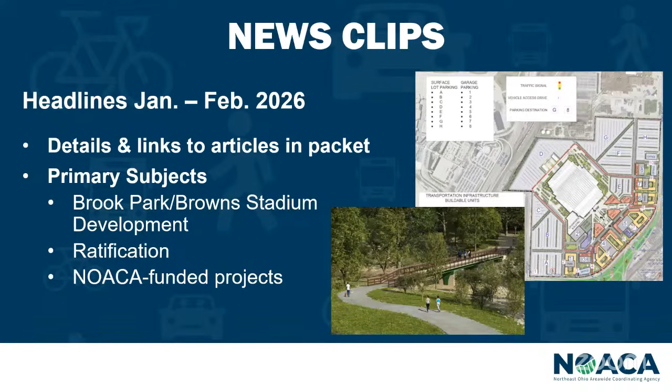Back to the reason we're here: we are here to plan for regional projects and then support them in getting done by helping to fund them. We had a successful GoHio commute campaign, being able to offset carbon, which is important in our air quality work.

External engagement, some of the things that I've been up to over the last 2 months. I went to NARC, the National Association of Regional Councils, their National Conference of Regions, which was in Washington. We spent a lot of time on the BASICS Act, which is a proposal to Congress of legislation relevant to local governments. It is part of a consortium of organizations that worked to develop this proposal, and we will be discussing it in great detail on our Transportation Day on April 1st.

So keep that on your calendar, and I know there's a slide here later that will remind you of that. I participated in a panel with ODOT and the Turnpike Commission about funding and budget forecasting for transportation. That was for WTS, Women in Transportation. I participated in the 2026 Safe Road Summit.

We were asked and able to participate in a session that focused on a national perspective in safety and highlighted the work that we are doing here in Northeast Ohio as exemplary. We also were able to participate in a session that we submitted an abstract for, and that's Vision Zero. And then we were able to meet yesterday with all of the participants in the CMAQ round and get the project sponsors moving earlier to begin their project work that has to move through ODOT and some other process points. Just wanting to make sure that we're moving the projects across the finish line.

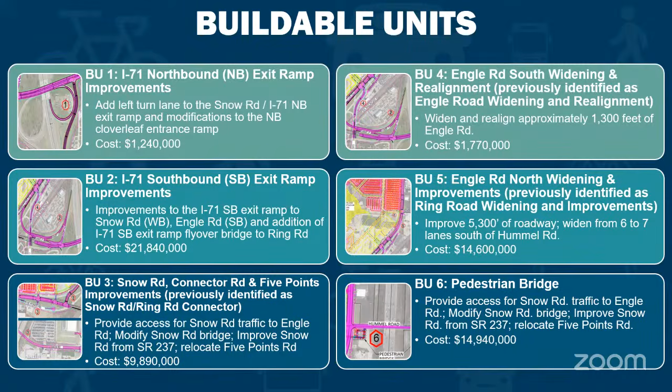The committee recommended there that the project be recommitted to the Transportation Subcommittee, subject to review of the severity of congestion during major events and possible resolutions, including impact to surrounding communities, access to Hopkins Airport and Southwest General Hospital during events, and then looking at regional impact and collaboration.

Then on December 5th, we presented it again to the Business, Community, and Rural Advisory Councils, followed by the Transportation Subcommittee. On December 19th, they recommended it to the Planning and Programming Committee. Then finally, on January 30th, it was presented for action to the Planning and Programming Committee and recommended for approval. We also, as we always do, presented it to the Executive Committee on February 13th for their recommendation as well to the board, which brings us to today.

Now I will turn this presentation over to Dr. Makarachi to share with you the NOACA analysis.

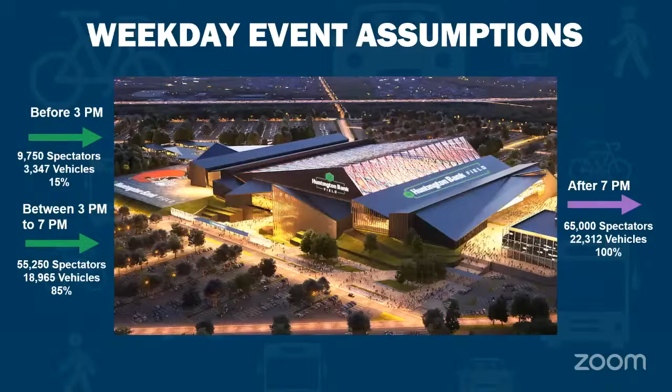So let me mention this first assumption. Again, this information is from the sponsor, and that's the stadium will have 65,000 capacity, and we assume that weekday event happens, not weekend. Weekend has got low traffic, so we assume the weekday event, and that's 65,000.

Then usually people travel to the game not alone. Usually most people travel with family or friends. So we use 2.91 as each car, divided by that for each car.

Then we have people coming from 3 to 7 to the game, and after 7 they leave the game. Why are we choosing these periods? Because our travel demand model has 5 periods, splitting the 24 hours into 5 periods. One of the periods, PM peak period, is from 3 to 7, and the nighttime is from 7 to 3 in the morning, and comes back 3 to 6, 6 to 9, and so on. So that's what you see in the numbers here.

The assumption is 15% come before 3 p.m. for a game and 85% come during the PM peak. Why is that important? Because the PM peak period is when people actually leave work and go home, and that's the most congested period of time in our region. Obviously after 7, when they leave, there's not much activity, it's mainly the trips from stadium back to home.

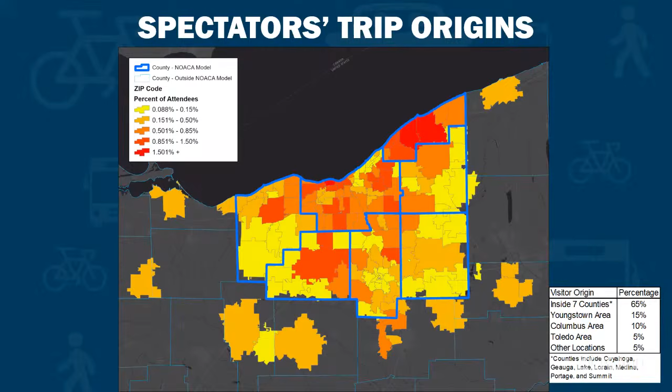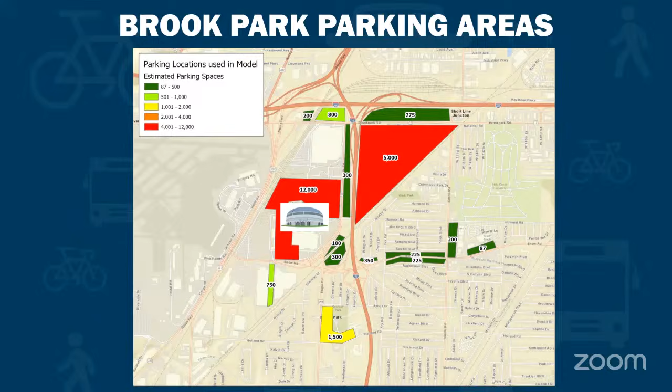Last week we had a workshop about this, and some people came, and the feedback we got was that some cities were concerned about the impact of this in their city, apart from the city of Brook Park. So we went and looked at this influence area, and we have this for each city on this map. We provide the impacts, and I have to say, one of my colleagues, Derek Taylor—I have to appreciate him—made the maps for this, and we had a very short period of time, from Tuesday afternoon to this morning.

These following maps were made by his team. Since I was working on something else, within a couple of days they provided this information.

What we are looking at in terms of the comparison is the auto and truck delay, and then volume capacity ratios. I have to emphasize the capacity I mean is not a storage capacity, but a road capacity, which means how much they can process cars within a period of time, an hour, three hours, whatever.

There were two locations they were concerned about: one was the airport, and one was the Southwest General. We looked at those using our travel forecasting model, and at the macro level, I'll show you. We use the micro level as well.

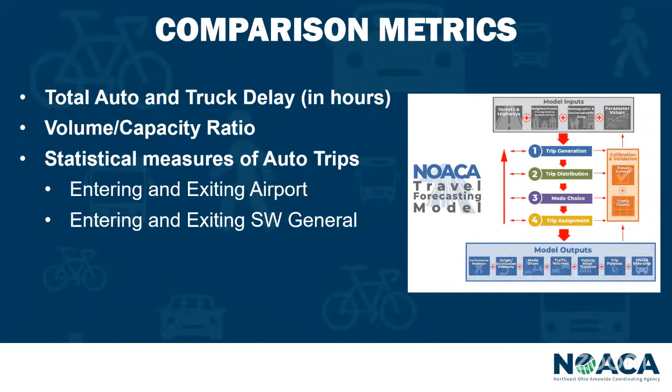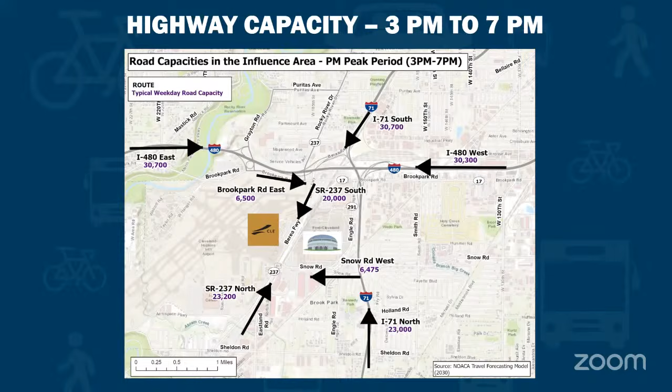About 30,000 on the highways, because it's mostly 4 lanes over 4 hours. This map shows - I think I missed something, no, that's correct.

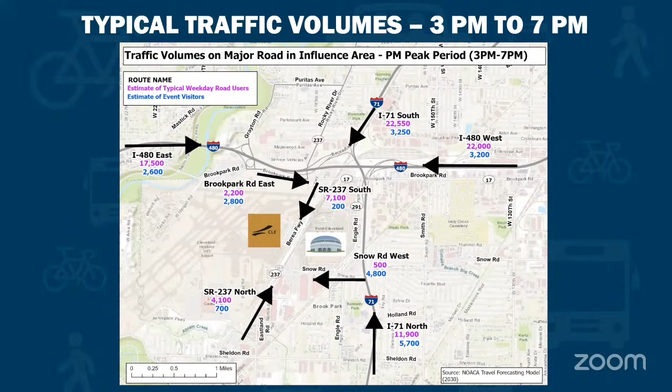So Ali, can I interrupt for a minute? Just to be clear, what this is demonstrating is that based on our independent modeling, the highway network has sufficient capacity to deal with the incremental traffic from the new development.

That's correct. The additional traffic we have is shown in blue, with the numbers and percentages I'm showing. Let me just review that quickly - the highway system around the stadium and in our region can handle that.

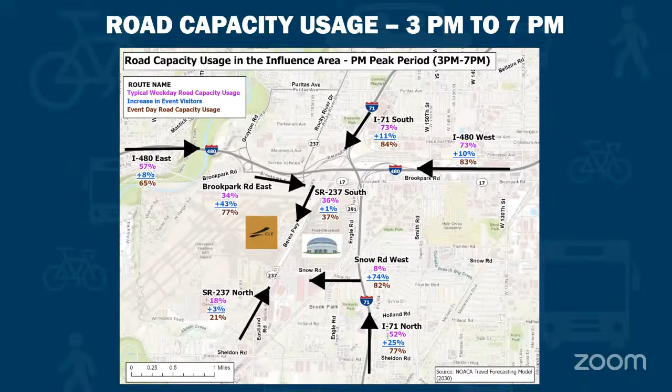Then we look at this area, and what you see circled is an interchange and intersection that is a concern area after people coming to the game. Obviously, when they get closer to the game there are more cars, so you can see.

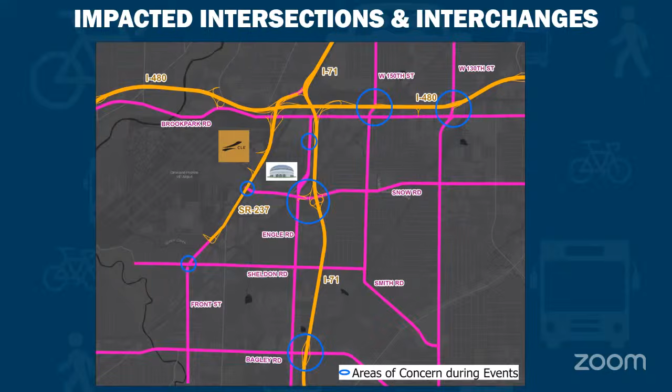We are looking at each community, as I mentioned, on the maps. Starting with Berea - what we have is yellow, which is very low, less than 10% in terms of capacity impacts on this area. The only concern is a little bit moderate, about less than 50% increase, shown in blue. There's only one location like that in Berea.

By the way, if any of the mayors, communities, or cities want this, we can send them the base, event, and difference maps. All this is done - as I said, Eric has made all these maps, and he can forward and send it to everybody on any committee that's interested.

This is Brooklyn, and there's only one location with a yellow impact, a minor impact there.

The city of Cleveland has got some borderline areas with Brook Park, and a couple, as you see on the map in yellow, which is about adding 10% to the capacity, to the volume for the capacity.

Next is the city of Fairview Park. Again, you can see on this map I showed earlier the influence area, and these are the cities around Brook Park. For Middleburg Heights, there's only one important interchange there, the Bagley Road interchange with I-71.

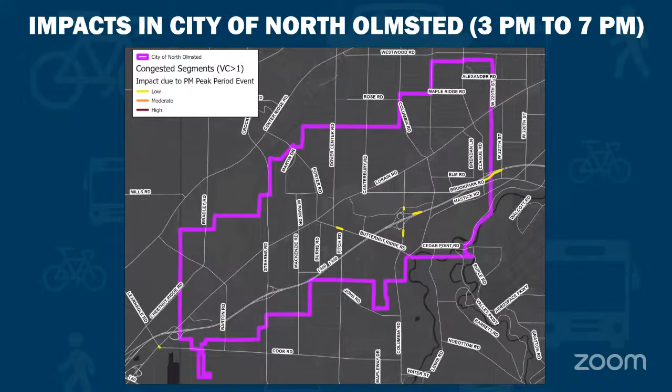Parma and Parma Heights - the only one place is a concern. The rest is yellow, or there's nothing, no changes on Parma and Parma Heights.

But the main issue is the city of Brook Park itself, and we'll come back to this and show the simulation for this area. There are several places either bordering other cities or inside the city of Brook Park. Those are the buildable units Ed mentioned, close to the stadium and development, to reduce the congestion impact of this.

As I mentioned, the other route to the airport was a concern. So what you see on this map, the black line shows the route to the airport. The majority of over 750 vehicles obviously come from neighborhoods, but that tiny addition is not significant. The green one is the one coming to the stadium.

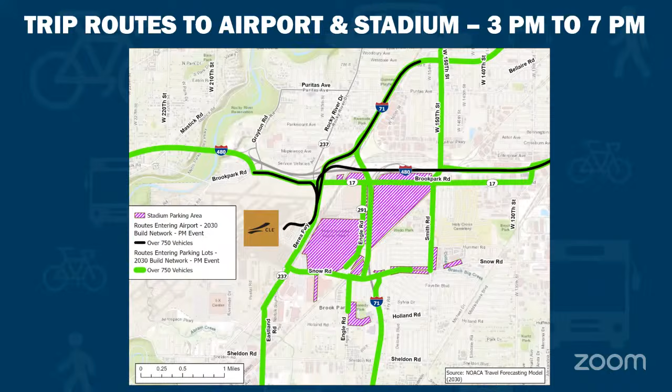Based on that, we took some statistical measures to see how much impact this has on trips to the airport. You can see on this weighted average for a base - when I say weighted average, we took the average of the travel time and added to it the number of trips coming from each neighborhood. The maximum delay goes up to about 3 minutes for some neighborhoods, and total delay for the whole region is 96 hours.

After 7, obviously not much traffic is going on, and it's 2.3 hours. So basically it's the same thing, you can see it's very close. We concluded that there is a marginal impact on travel to the airport.

Southwest General, that's the hospital south of Middleburg. Again, the black line shows the trips going there. This is a technique we use in our model - identify the cars by their destinations, tag them, and show them. The black line shows some of them going to Southwest General Hospital, in the opposite direction of people coming to the stadium.

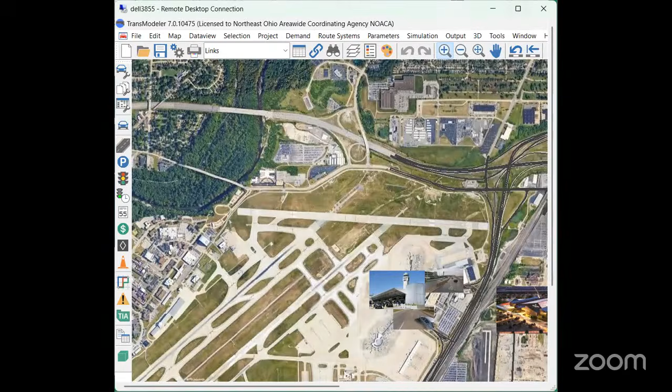However, we have identified, as you just saw, many other pinch points and potential areas of congestion that will require some mitigation. Those have not yet been studied enough, or there have not been recommendations on infrastructure solutions.

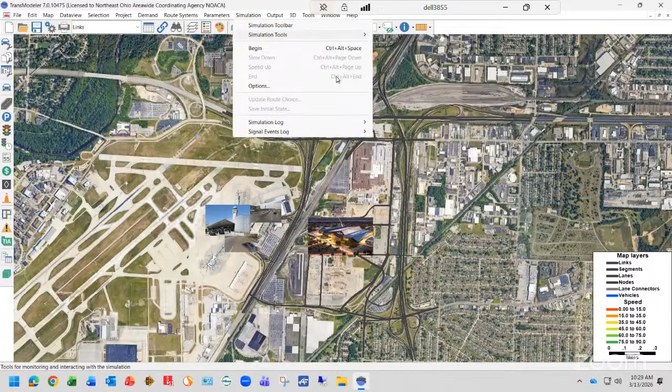So what staff is proposing is that we concur that the 6 buildable units being requested by Brook Park for this project will in fact help alleviate the congestion for the city of Brook Park around the stadium. For the other communities, we are saying that this action is contingent upon further review of those other communities, development of solutions for their transportation infrastructure.

That would be a phase 2. So this will be phase 1, only the city of Brook Park, but we are concerned about those outlying communities, and that will be phase 2 that would come back to the board.

Is there any questions for the speaker? So I think Ali's going to show a simulation. He's pretending that it's a day in 2030 after the stadium has been built, and there's an event on a Wednesday afternoon. This is intended to be a worst case scenario. So go ahead, take us through the simulation.

There's a question. Executive Director Gallucci, if I could just ask a couple questions related to what you just mentioned, and we appreciate the suburbs around this development being included in some of the analysis. One is what consideration has been given for the future of the IX Center. I think that's important, and I'm not sure with the changes there recently how that can be considered. Also, I would include the Metro Parks.

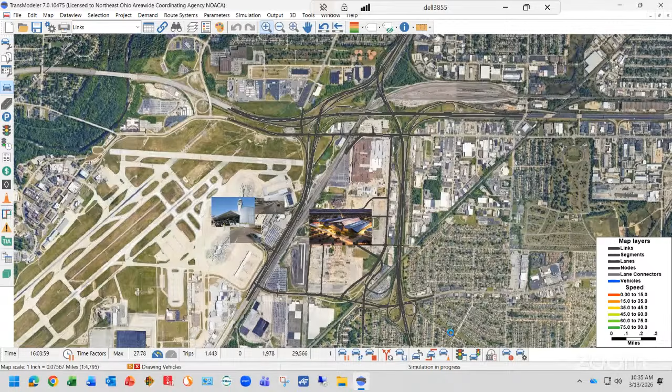That's the Snow Road interchange, and importantly, if you look at the right-hand side legend, cars are colored based on their speed. Let me zoom in more so I can explain.

The yellow goes down, and when it's red, you see here, for example, they stop by the traffic lights, and the vehicle's color changes to red and orange and stops because the speed comes down to less than 15.

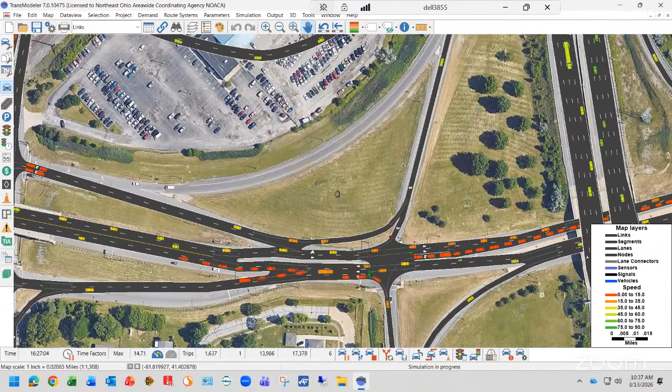When I zoom out, you see more, and these show groups of vehicles, each circle representing a group. You can see again based on the color of this, and one concern and question was about 237.

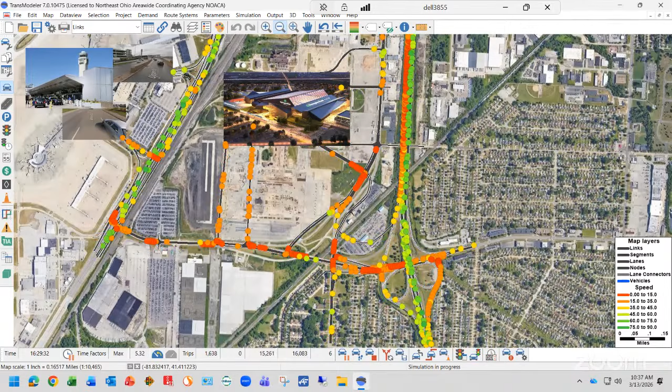I will go near the airport. These are the entrance and exit from the airport. As you see, 237 is mainly light green, or when they slow down here wanting to go inside the parking lot, they become yellow and reduce speed.

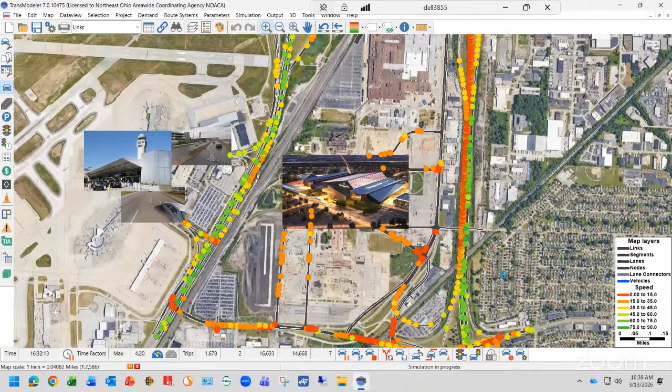The interesting point is on this side, I-71 - that was one of the workshop questions. We were asked to look at the highways. As it goes south, people go to the parking lot and the traffic comes back.

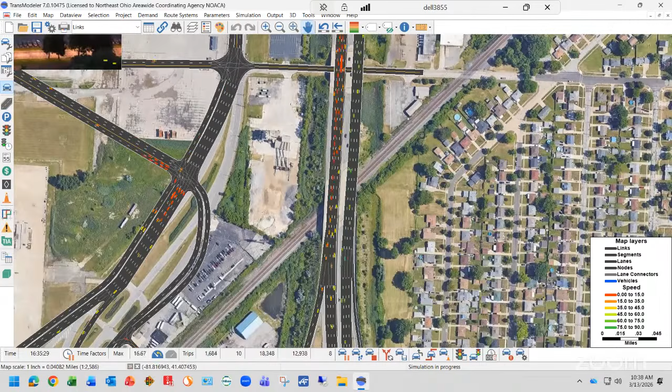This is one of my routes home on I-71, and I can tell you this happens mostly in the afternoon. I want to draw your attention to the color of the cars before they exit to the stadium.

And after the exit, you can see there's a little bit of delay there, orange and red, then it goes down, becomes green, comes back the same, and the other side, same thing.

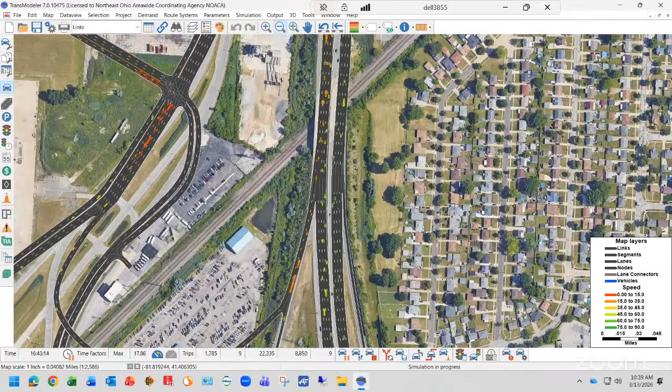Let's look a little bit north, and I want to pay attention to 16:42, 43. If we go north, because people are now close to the event, there are more cars on I-71.

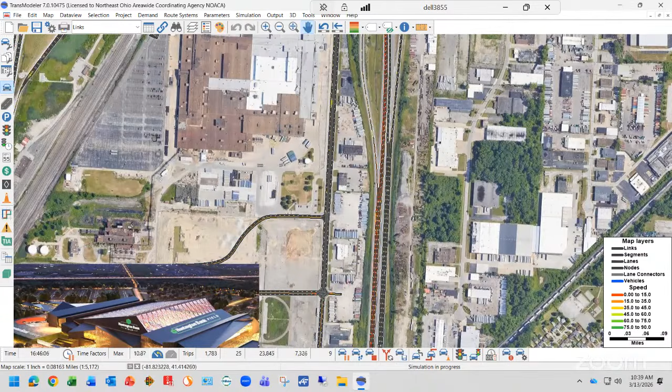But if I go to this side of the airport, still most cars have their own intended speed - 60, 45, 55.

As you see, the traffic is fairly fine on Brook Park, and let's go more north to 480 and all this Spaghetti Junction here - all these are moving apart from I-71, which is going to the stadium. The rest don't have much traffic. Now look at the time in the left corner, 16:49.

I can zoom into one area here for the intersection of Brook Park, and you can see people.

I could show this in 3D, but I'm afraid it might cause memory issues and crashes, so that's why we're staying in 2D, but I can make a video for the 3D version.

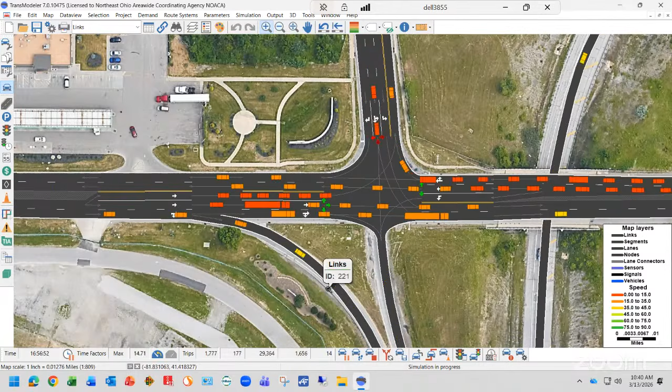That's 16:57. We are getting closer to the end of the simulation time.

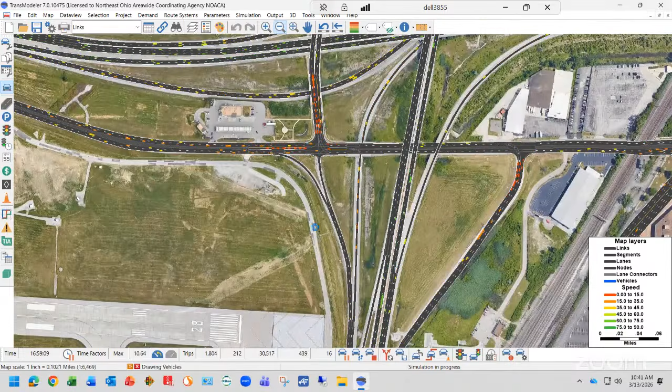Traffic is impacted, but we expect that when you have 65,000 people come to the game. So this is the end of the 5 o'clock, and the results are now in the files, showing the delay and average speed for each of the road segments.

Now, the next one I want to show you is the evening when people leave. Still, we are okay with that.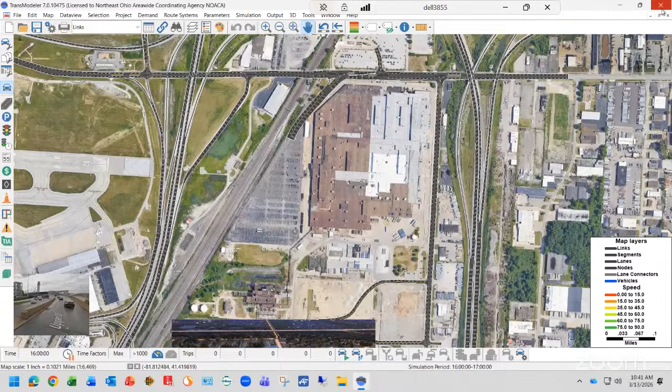Can I close it? Close and open up? Okay, I was told not to click so many times. You have seen this.

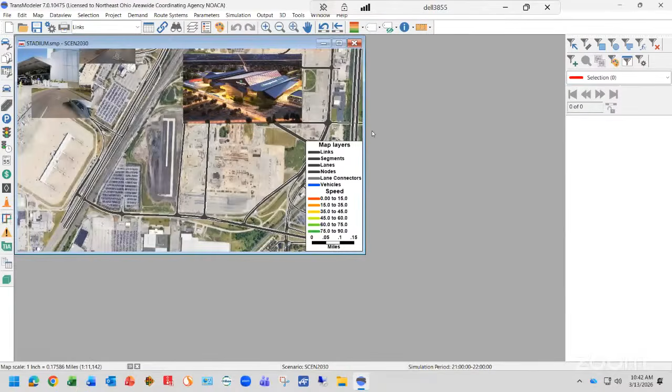What I'm going to show you, sorry for the delay, is after the game, when the game finished and people are leaving the area.

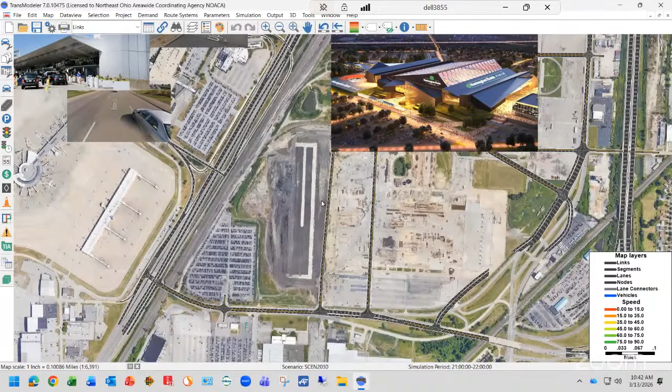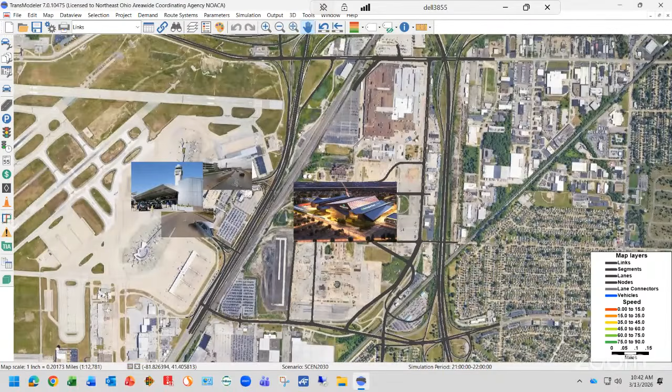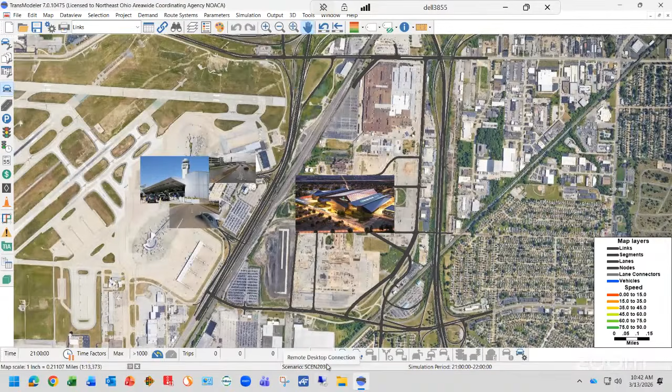Obviously this is not much of a concern because the daily traffic is much lower. This is starting from 9 o'clock, 21, on the left corner, and for an hour I will show you.

As you see, I draw your attention to when it comes - fewer flights after 9, so the number of cars coming to the airport is less, but the number of cars leaving the airport is much higher than the number coming in. This is because at 9 o'clock, not much - all the flights are in the afternoon from 3 to 5, according to the data we got from the airport.

On I-71 at this time, there's no red, everybody is moving. The only thing is everybody leaves the stadium through different gates, and this is very normal because we are assuming 12,000 cars suddenly use a 2-lane or even 1-lane exit.

That's going to be managed by the city of Brook Park. There will be a camera and they will be managed by police to make sure everybody - but as you see from this picture and simulation, most people try to reach I-71 south and north and leave the area, because I-71 has enough capacity and there's no daily traffic at 9 o'clock - no work trips, nothing. So many lanes are vacant and they can use them.

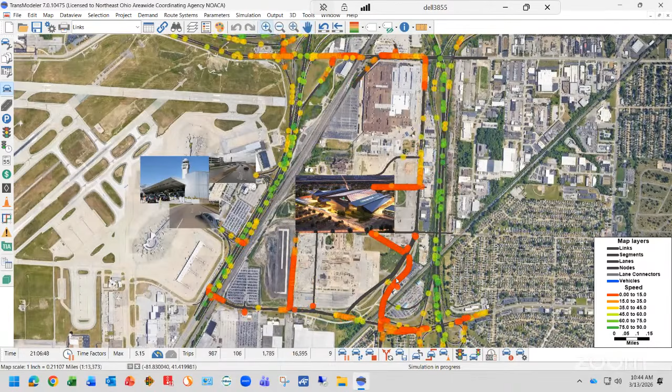But the problem is getting access to the freeway. As if I go north now - I have to zoom in and speed up a bit - the main issue, as you see, is the red: people coming out of the stadium want to go.

to Snow Road and come to the two ramps of I-71 to go north and south. There's no issue on these ramps. The main one, as you see, for example, is the one we had on the approach to the stadium, the one I am talking about.

This is the wrong time - so the one I'm talking about is the exit ramp. There's not much there because people are leaving, not coming; in the PM, it was coming, now there's nothing there and not many cars here and there - but the rest you can see, all this. But let's look at the north side of it.

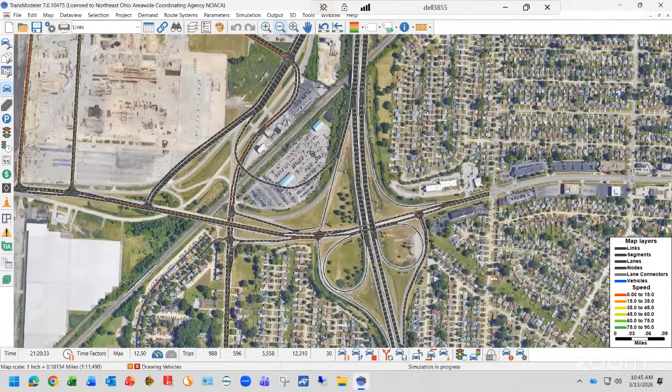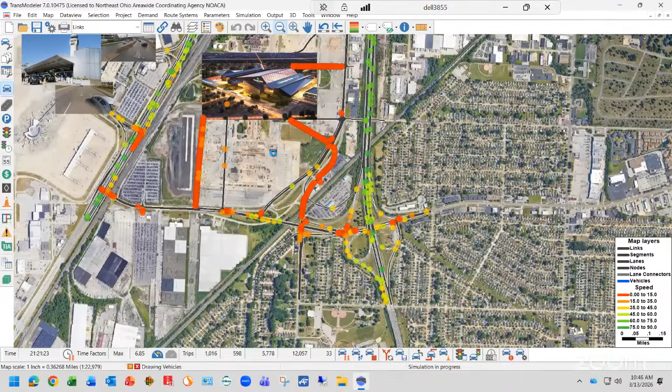And now is it 9:20? Still the exiting gates are congested. Maybe people should take some drink before they leave home - they can do something there before. Hopefully they have won the game on that day.

So now it's 480 here, east-west. Again, not much - there's no daily traffic, so even Brook Park is much quieter. The only people are those who want to go from Brook Park and Engle Road north. One of the buildable units was to widen Engle Road, which helps people go to Brook Park and out of the area.

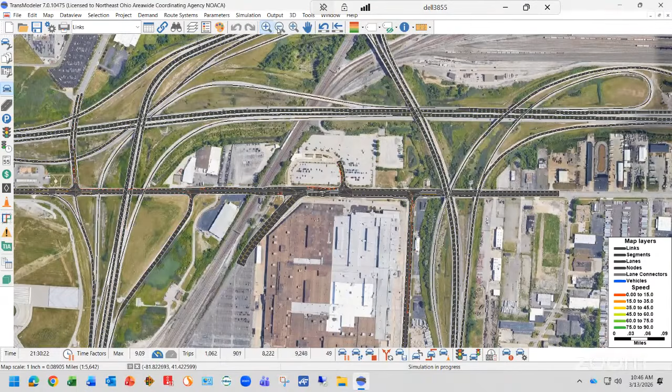Now it's 9:30 in this simulation, and you see on 480, as I mentioned, the Spaghetti Junction is pretty quiet, and the traffic is green - most going 60-70, with some yellows because they're coming to a ramp where the speed limit is about 35, so they slow down. The simulation perfectly shows the color of the cars as they slow down. As you can see, Brook Park is red because there's a traffic light and they stop there.

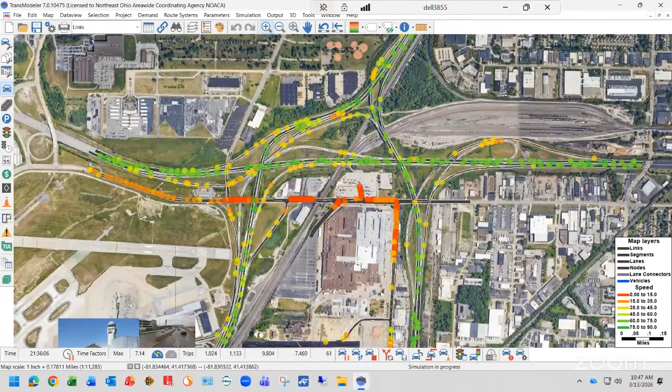So then another visit is at 2135, another visit to see what happens to the airport.

As you see, as I mentioned, not many traffic is coming to airport because it's now 9:30, not much flights. But leaving is, there is more traffic going, and you can see patches of the green color cars.

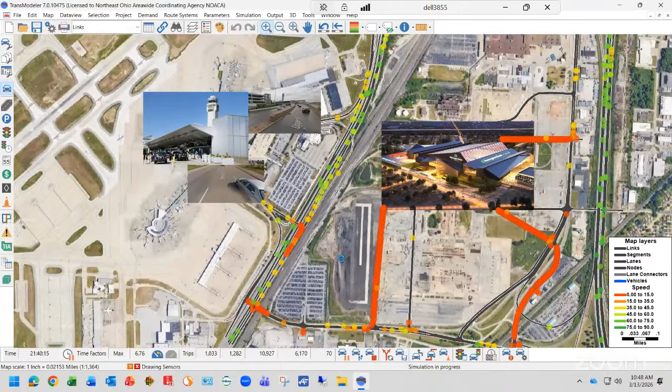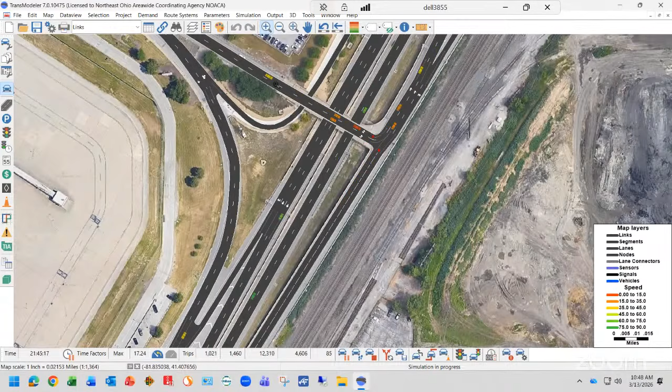Those are stopped there. 237 is going at speed, 65, 60. So you can see that if I go south, when they go down to go to Snow Road, because Snow Road has got some delay, there will be some delay when people leave. Not much, but you can see there's some usual delay on this.

I've got everybody asking, wants to know the delay after the simulation for this. I've got the numbers, and after simulation stops, the numbers go to a file, and I can give you the average speed and the amount of delay for each intersection.

One more thing I have to mention here, this is the time, a month or two ago, we decided to do this. Signal timing is very important. I tried my best, but if we had more time, we could make it much smoother with the number of the signal times. So that's the signal timing.

So that's the end of the simulation. That's without a crash, so I can say well done to myself. Thank you very much. Now we need to go out of the simulation, back to the presentation.

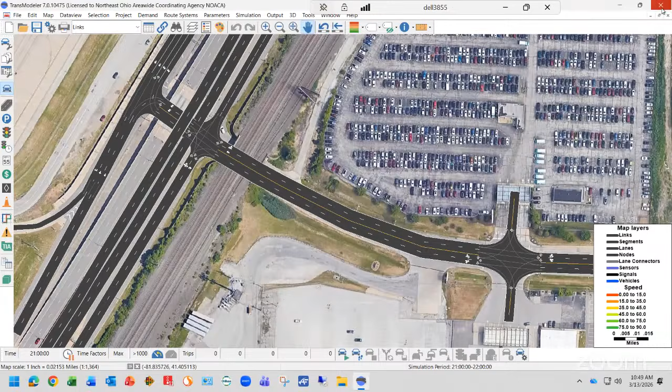Let's close it. Close it. Yeah, I'm gonna ask. Is it time, at this time, is there any more questions from the presenters or us?

Go ahead. Thank you. I have just two questions. My first question is, through the modeling, does it take into account whether there's active construction or lane closures related to that, or to crashes either on 480 or 71 or any of the local roads? Just wondering if that's taken into account.

My second question is related to when safety analysis would be done, particularly for pedestrians. I want to provide a little context, because we still have stadiums in Cleveland and people walk upwards of a mile to go to the Guardians game, for example, across from the parking lot located at the West Side Market. It's a similar distance from the Brook Park Station shown in the project area to where the new stadium is being proposed. Particularly employees or guests who would prefer to take the train or park at Brook Park itself and walk. I'm curious if and when there will be a safety analysis for the crossings related to that type of behavior.

Regarding your first question, in our field that's called incident modeling. We are not doing incident modeling for road closures, accidents, or if there's a crash causing delay. We are talking about a typical day on the roads, and that typical day accounts for a percentage of these kinds of accidents, crashes, or delays from road closures. We add the traffic volume attracted to the stadium on the daily typical day. Our model is for the typical day for investment purposes, not incident modeling. All the MPOs in this country always model the typical day, with some percentage built into the parameter values to take care of that. But if there's an accident on I-71 causing a delay, that's incident modeling, and that's not the concern of this project.

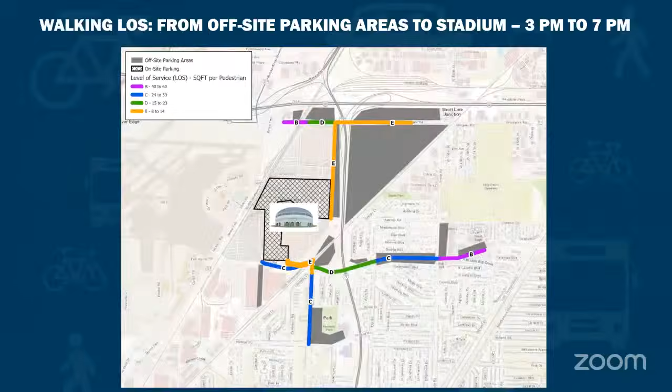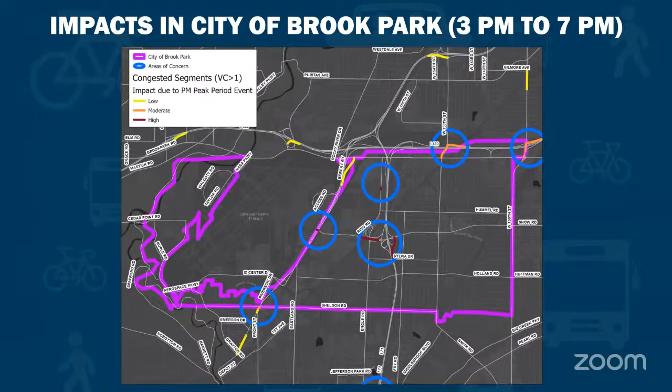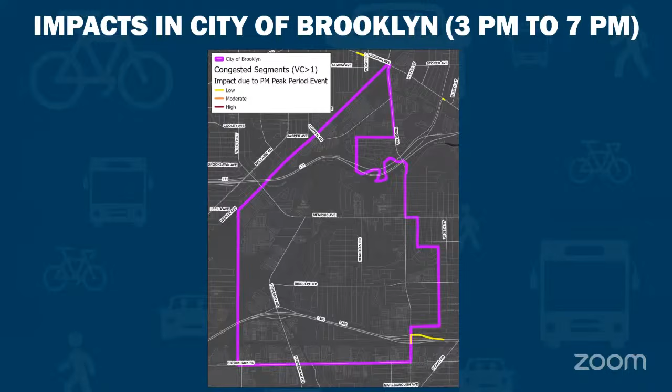Middleburg Heights, North Olmsted, Fairview Park - we have identified Cleveland and all of those adjoining communities where we believe there are congestion issues that have not yet been addressed, both in studying it and then proposing infrastructure solutions. And I guess they don't all have to have infrastructure solutions - some might have operational solutions. And Berea as well. So those are the maps and why we've included them in the discussion today.

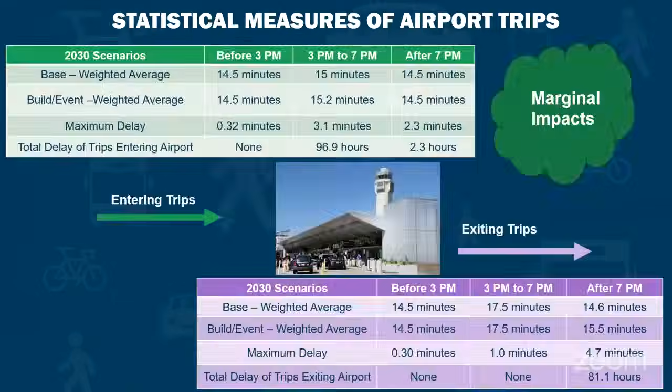Okay, I appreciate all the hard work your staff has done. This is a big project and we should have meetings like this. This is just one of the steps towards this project. To me personally, this project is a job-creating project, not only for the construction people, but for years to come afterwards. Again, thank you to the staff for the detailed report.

Yeah, thank you. I would like to recognize particularly Dr. Ali Makarachi, who has the modeling background that is very rare to get at an MPO, and also Derek Taylor, who works with Ali on these kinds of analyses. We do have an incredible in-house capacity that most MPOs do not.

Okay, so we have a motion, second, and discussion is complete. Right? Do we have to put in Mr. DeRosa's comments as an amendment? Question. I think that was the question.

On the motion, on the resolution itself, it's got language in there - now I've lost it - Section 2 talks about the project sponsor must endeavor to comply with any conditions or recommendations that have occurred as a result of the project planning review and will provide evidence of such. So I don't know if that's in there, but that's different than what we're discussing.

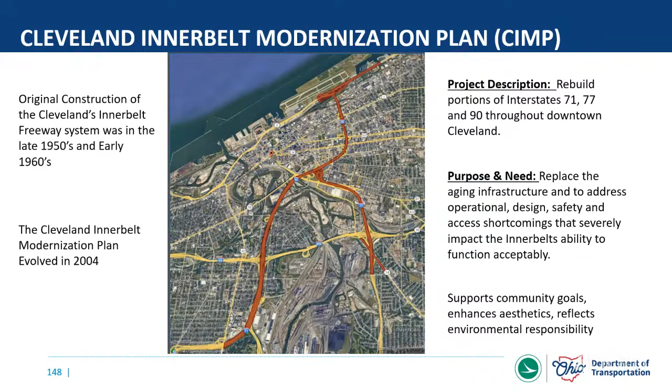The Innerbelt Modernization Plan also supports community goals and enhances the aesthetics of the built environment, and it reflects high standards of environmental responsibility.

The project timeline leading up to the approved NEPA document started with the Innerbelt Major Investment Study in August of 2000 and led to the Innerbelt environmental documentation and preliminary development in 2004 under PID 77510.

Conceptual alternatives were approved in 2006, and the feasibility study was approved in 2007. In June of 2009, the interchange justification study was approved for design year 2035. The preferred alternative was approved in 2009 prior to the NEPA environmental document approval on September 18th, 2009.

The Innerbelt Modernization Plan was evaluated as one complete project, both in the NEPA document and in the interchange justification study. However, due to the size and complexity of the project, its extensive cost, and the need to maintain traffic, we required the improvements to be systematically phased.

So the project team developed a phasing plan, taking into consideration current conditions, maintenance of traffic, constructability, and the utility of the finished segment. The phasing plan includes 7 construction contract groups, referred to as CCG 1 through CCG 7. You will see in the upcoming slides that these 7 contract groups have been separated even further, and that's to assist with funding and construction phasing.

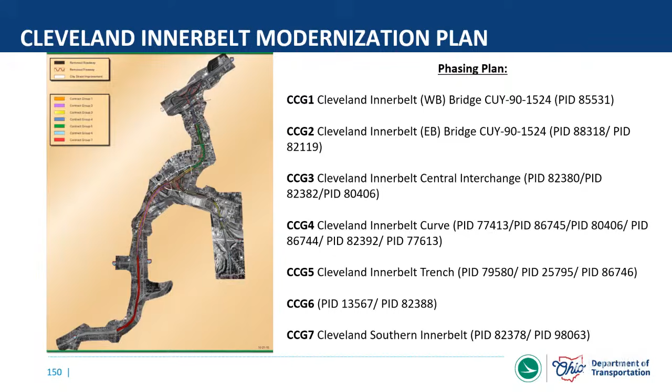Today, we are on track to have the plan completed by 2040, but this is greatly dependent on maintaining strong local and regional support and capturing project funding. The biggest challenge is capturing project funding due to the extensive cost of the Innerbelt contract groups. This challenge is amplified as costs continue to grow due to inflation rates. Budget and schedule are updated annually as part of our Innerbelt financial plan submitted to FHWA.

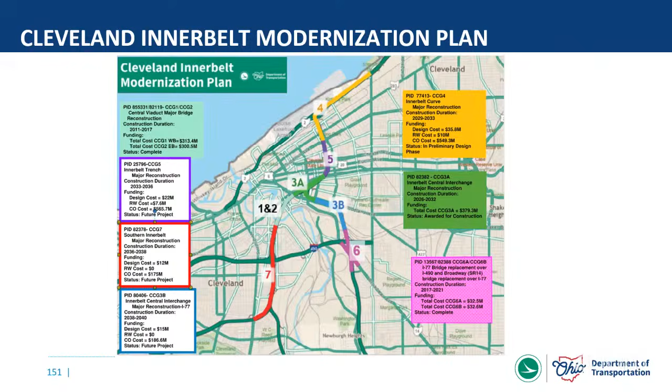As John mentioned, the estimated total project cost for the Innerbelt modernization plan is over $2.78 billion, with $187.7 million for engineering, $141.4 million for right-of-way, and $2.45 billion for construction.

44% of the plan is funded, leaving 56% unfunded. Factors that continue to be a risk to the project budget include construction inflation, industry capacity limits, potential material shortages,

accuracy of preliminary estimate, right-of-way costs, and the project development timeframe. So far, $1.23 billion has been invested into the Cleveland Innerbelt project. Costs shown here for the funded phases are actual costs incurred for completed work, with the exception of CCG 3A and CCG 4, the PE design. These are future costs currently under contract that are controlled by contract documents. The project total costs discussed and shown in the presentation include project design, construction, and construction engineering costs.

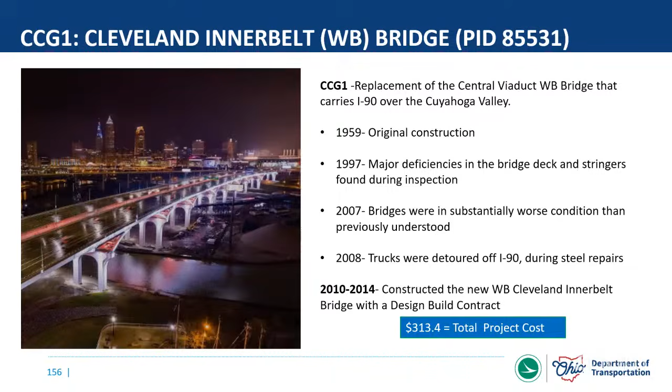CCG 2 is the new eastbound Innerbelt bridge and was constructed between 2014 and 2017. This phase also included the demolition of the existing Innerbelt bridges, and the total project cost for Group 2 was $300.5 million.

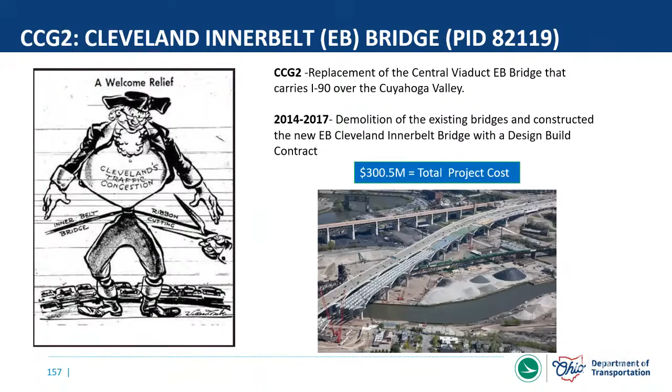Group 6A replaced the mainline Interstate 77 bridge over Interstate 490 and widened the structure to 6 lanes to address congestion, condition, and safety issues. The phase was constructed between 2017 and 2021, and the total project cost for 6A was $32.5 million.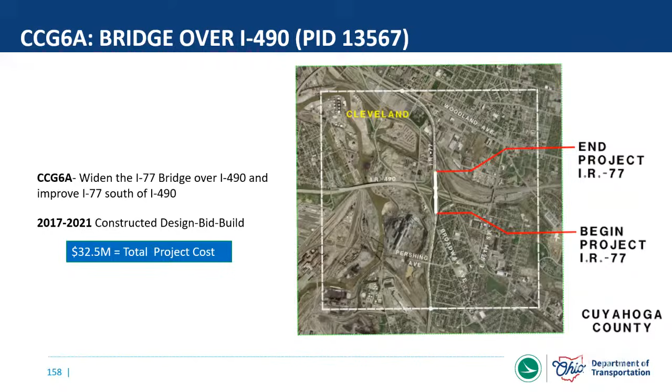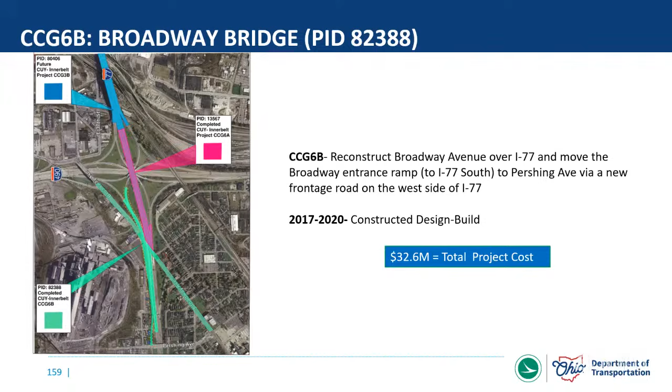CCG 6B reconstructed a longer bridge for Broadway Avenue over Interstate 77 and reconstructed ramps to provide standard lane widths and merge distances. The project redirected the Broadway Avenue entrance ramp to Interstate 77 southbound along a frontage road constructed from Broadway Avenue to Pershing Avenue to maintain access to 77 southbound. The project was constructed between 2017 and 2020, and the total project cost for Group 6B was $32.6 million.

CCG 7A improved Interstate 71 southbound between Interstate 490 and the State Route 176 South exit. The project included a deceleration lane for southbound traffic exiting to State Route 176 South and improved the Interstate 90 East and Interstate 490 West entrance ramp to State Route 176 South. The project was constructed between 2020 and 2022. The total project cost for Group 7A was $4.6 million.

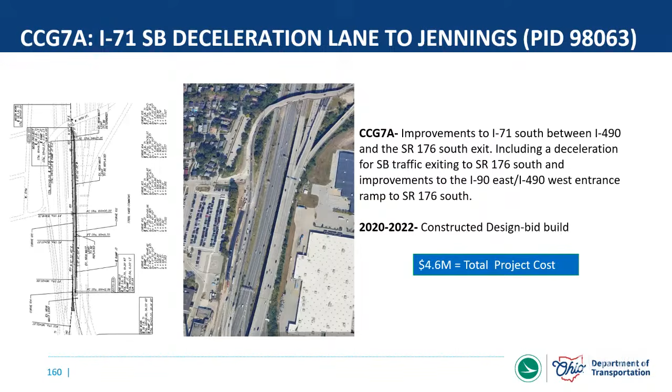Currently, we are getting ready for construction for CCG 3A, the Cleveland Innerbelt Central Interchange. CCG 3A is the reconstruction of the Central Interchange and Interstate 90 from East 9th Street to Carnegie Avenue. The project includes 6 connecting ramps, including restoring the 90 eastbound to East 22nd Street connection, 4 surface streets, multiple retaining walls, and 6 bridge structures, including Carnegie Avenue and East 22nd Street.

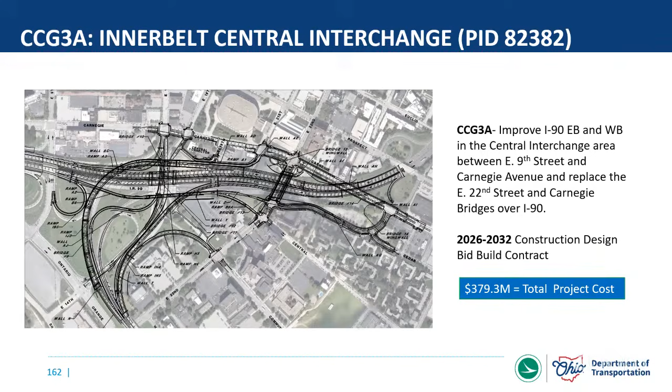The project was just awarded to Kenmore Construction, as John mentioned, for $328 million. The total project cost, including design, construction, and construction engineering, is $379.3 million. Construction for Group 3A will be a 6-year project beginning this spring and finishing by 2032.

Future projects include Group 4, the Innerbelt Curve reconstruction, Group 5, the Innerbelt Trench reconstruction, Group 7B, the Southern Innerbelt, which includes Interstate 71 improvements, and Group 3B, the Interstate 77 improvements leading into the Innerbelt Central Interchange. The timeline and sequencing shown here is subject to change. The department will evaluate future phases to ensure they are buildable and fundable. We are committed to advancing future phases as efficiently as possible to maximize the benefits of these improvements and mitigate potential cost increase associated with inflation.

CCG 4 is the reconstruction of the Innerbelt Curve and is the northernmost section of the Innerbelt Modernization Plan. The Innerbelt Curve section consists of a full systems interchange between Interstate 90 and State Route 2. Construction will include flattening the curve radius of the Innerbelt Curve, eliminating the reduction in westbound lanes to State Route 2, reconstructing the interchange between Interstate 90 and State Route 2, consolidating ramp access, and realigning city roads. CCG 4 is separated into smaller phases to help make it easier to fund and to help isolate risk from third-party coordination.

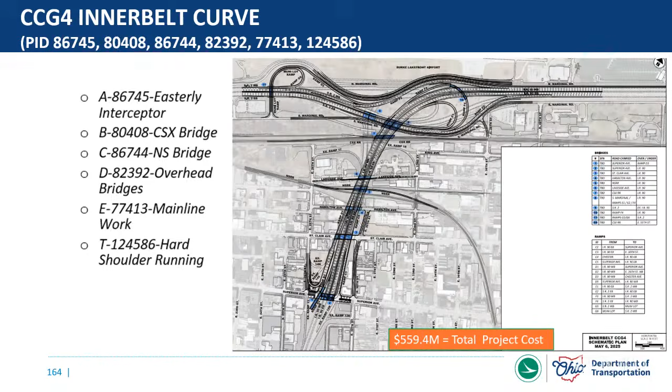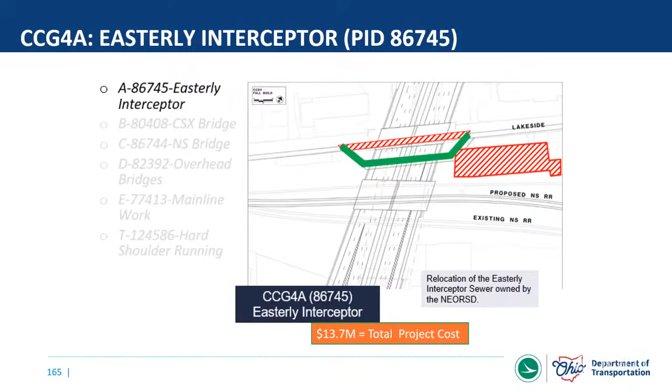CCG 4A is the Easterly Interceptor Project. The Northeast Ohio Regional Sewer District utility is anticipated to be impacted due to the lowering of the Interstate 90 pavement. Future coordination with NEORSD will include discussing options of either slip lining or replacing this section of the interceptor. The total project cost for Group 4A is expected to be $13.7 million.

CCG 4B will replace the CSX Railroad Bridge over Interstate 90 at a new location to accommodate the realignment of the Innerbelt Curve, and CCG 4C will replace the Norfolk Southern Railroad Bridge over Interstate 90. Early coordination with the railroads has already begun, and the total project costs for each of these groups is estimated to be $72.1 million.

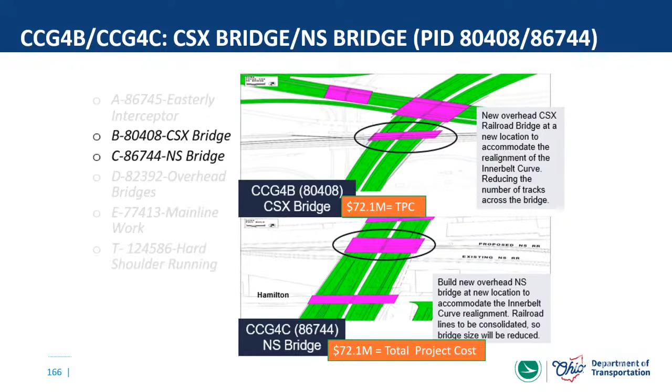CCG 4D will replace Superior Street, St. Clair, Hamilton, and Lakeside bridges over Interstate 90. Work includes replacing the existing structures with longer spans to accommodate the future widening of Interstate 90. The total project cost for Group 4D is estimated to be $66.4 million.

The alternative evaluation report for the Innerbelt Curve project, we're expecting this to be submitted this fall. We are evaluating the refinement of the Interstate 90 alignment, so that these overhead structures can be constructed without impacting existing pavement. Ideally, we would like to prioritize Group 4D ahead of mainline Group 4E.

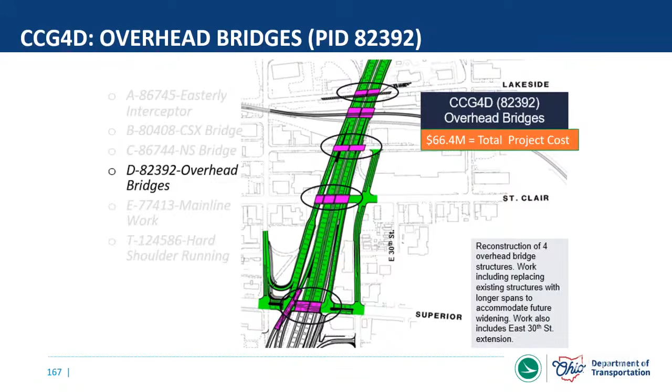Mainline CCG 4E is the mainline Innerbelt Curve project. Work includes reconstructing the Interstate 90 pavement and realigning the Innerbelt curve north of Superior Avenue. The total project cost for Group 4E is estimated to be $316.1 million.

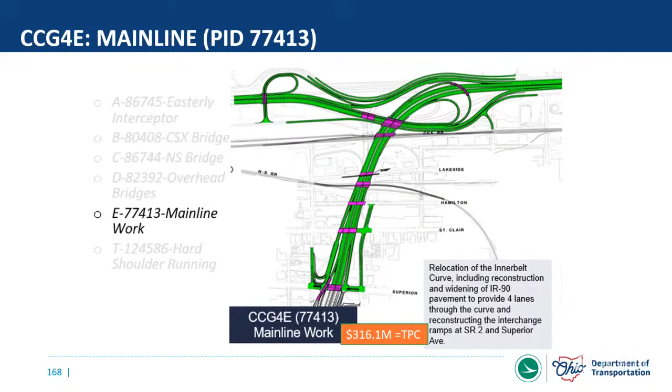CCG 4T will construct the addition of a smart lane to Interstate 90 westbound from State Route 2 to Interstate 77 southbound. The smart lane will be a left lane, part-time, hard shoulder running used during peak congestion.

District 12 is prioritizing CCG 4T, the Smart Lane project, as the next Innerbelt construction project to be awarded. We hope to have this constructed prior to the completion of the City of Cleveland's North Coast Connector project. The total project cost for Group 4T is estimated to be $19 million.

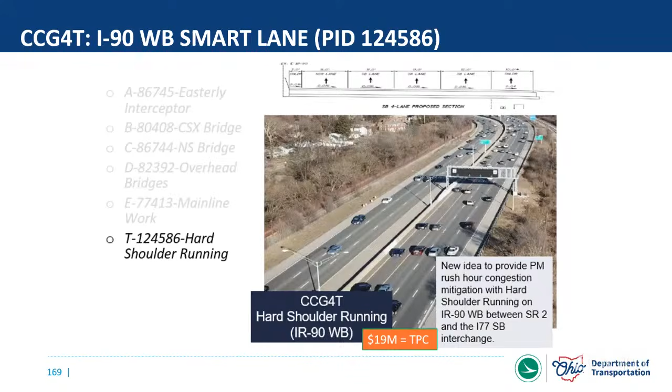CCG 5 is the Innerbelt Trench, the section of Interstate 90 between Carnegie Avenue and Superior Avenue. Work for this phase is anticipated to be split into 3 groups.

CCG 5A will reconstruct 4 overhead bridges at Prospect, Euclid, Chester, and Payne. Work will include replacing the existing structures with longer spans to accommodate the roadway work in the other CCG 5 trench phases. Due to the condition of these structures, the alternative evaluation report for CCG 4 will evaluate the alignment refinement through the curve and through the trench to hopefully open up the option of advancing this 5A project earlier than expected.

CCG 5B will reconstruct eastbound I-90 through the trench, and CCG 5C will reconstruct westbound I-90 through the trench. Total project cost for the Innerbelt Trench is estimated to be $587.7 million.

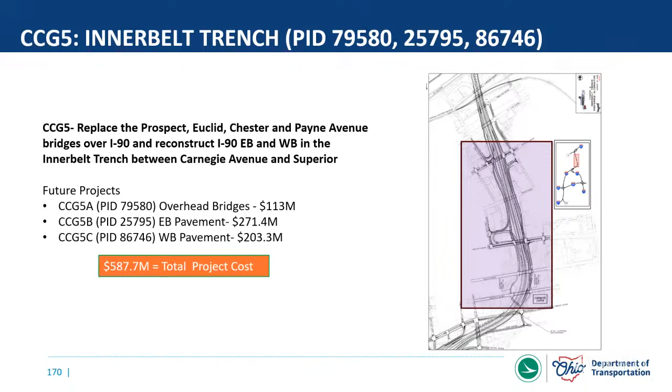CCG 3B will reconstruct the Interstate 77 approach to the central interchange, including mainline bridge and pavement replacements. During the CCG 3 discussions to split this phase into Group 3A and 3B, it was determined that the bridge decks in this Group 3B needed to be replaced based on the performance of other interstate bridges of similar age.

So we have just awarded project PID 119380 to replace the Interstate 77 bridge decks over East 22nd Street, Woodland Avenue, and East 30th Street for construction costs of $25.2 million.

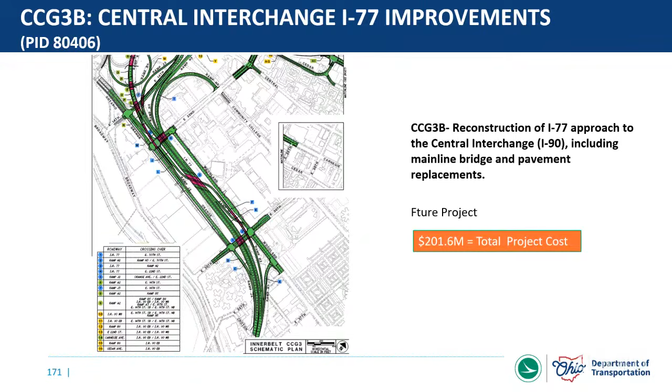The deck replacement project construction is to begin at the same time as CCG 3A this spring, and it will be a 2-year project. This work ensures that the bridge condition will withstand another 15 or more years until the 3B project can be constructed. The total project cost for Group 3B is estimated to be $201.6 million.

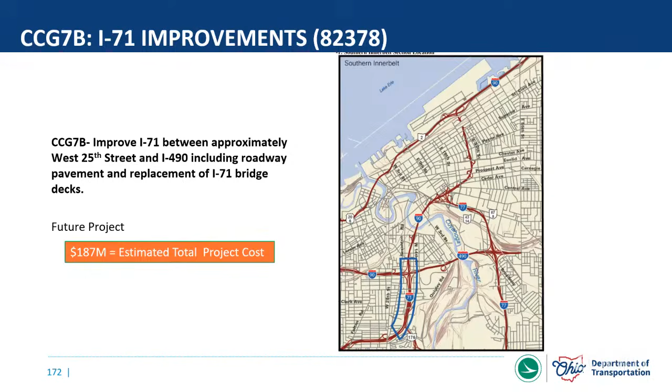CCG 7B, known as the Southern Innerbelt, will improve Interstate 71 between West 25th Street and Interstate 490. Work is to include replacement of the roadway pavement and the Interstate 71 bridge decks. The total project cost for 7B is estimated to be $187 million.

Just to conclude, if you're looking for more information on the Innerbelt or future updates, we do have an Innerbelt ODOT webpage. It's innerbelt.org. Please, if you have time, visit our website. And thanks again for giving me this opportunity today.

Is there any questions?

You had mentioned in one of the slides about the connector in downtown Cleveland. Just wondering if you have at this point considered, or perhaps are going to be studying, the need to even connect from 90 West to Route 2, because the west segment is going to be decommissioned from, whatever is West East, Third or Sixth to further. And then that other portion going west has already gone from a 50-mile-an-hour highway lookalike road to a 35-mile-an-hour boulevard. So if you did that, there's probably an easier and perhaps less expensive way to flatten that curve. I don't know if you've looked at that yet.

Currently both projects are being coordinated together. We are included in both the traffic studies for both projects. And there's also a connection at the curve in East 18th from the North Coast Connector. So both projects are coordinating regularly on how they're going to be implemented and how it's going to work. Thank you.